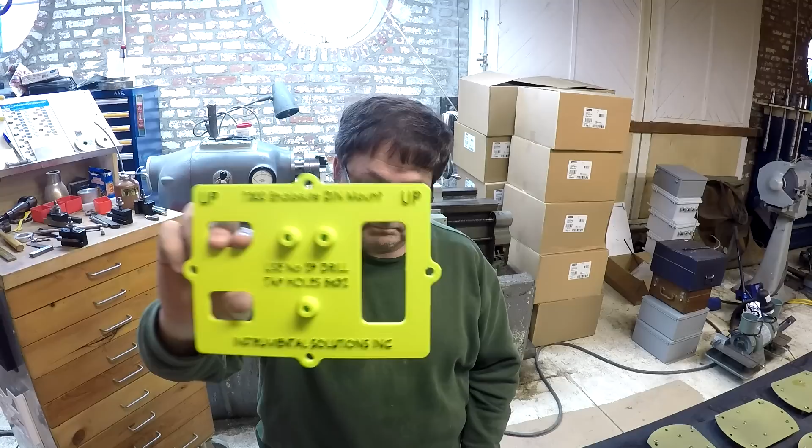Here we go. As you can tell, I 3D printed it. Take a look. At the top, it says 7300 enclosure DIN mount and up. And then there's some bosses to hold the drill guides. And I even included some text that says use a number 29 drill. And then that's my company name on the bottom down there, Instrumental Solutions Incorporated. And so this is the guide that I printed.

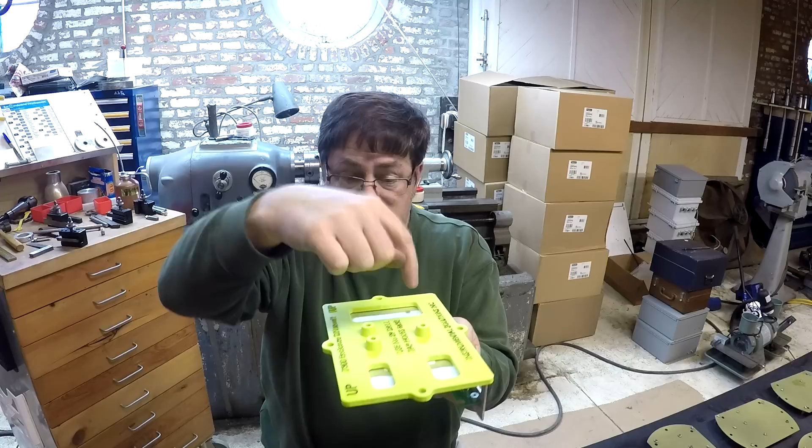And then the idea is to take this, put this over like a sacrificial block in the drill press. And then this will go up top. And then boom, boom, boom, boom, boom. You'll knock your holes out and you're good to go.

Why did I design it this way? What you see is I've got these holes in the sides, and I got some dowel pins. These dowel pins are going to go in these holes, and then a dowel pin on each side. That's what's going to locate this on the back of the box. You're like, why did I do it that way? Well, let's go to the computer and jump into SolidWorks. I'll show you the CAD work that I used to design this and why I came to the conclusion to do it the way that I did it. So let's get over to the computer and check that out.

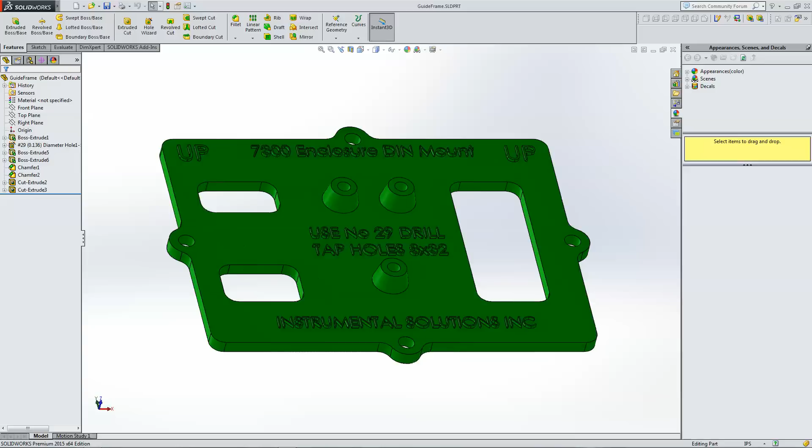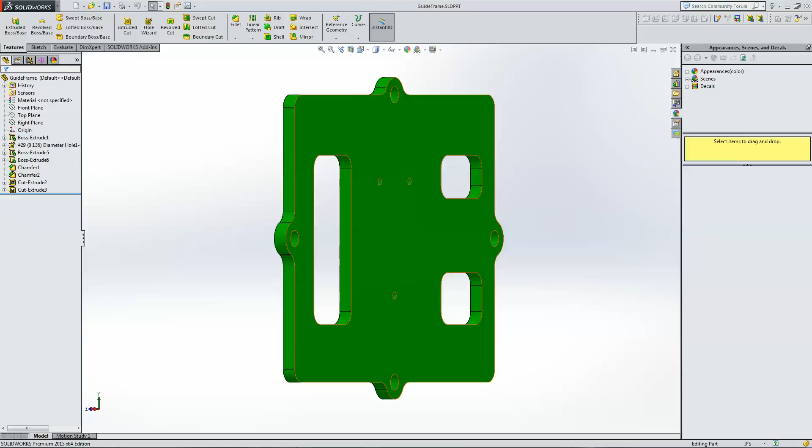Alright, so we're over at the computer here, and this is the CAD work that I used to generate this 3D print. What I originally wanted to do, which was kind of more normal, is I wanted to draw this top piece here solid, and then off the back, I'd extrude this out, and then I would leave a recess, and then it would just drop down over the box. Now I wouldn't need these pins. The reason I didn't do that is because you can't print over air, and I didn't want to have to leave support material in this big gap.

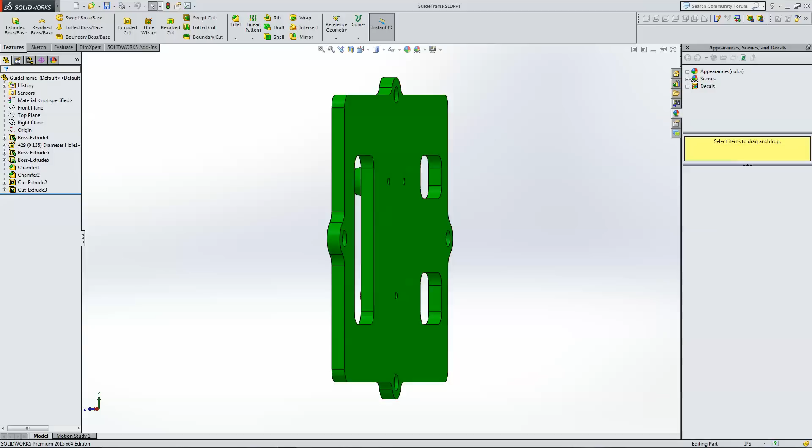The enclosure back panel is 7 3/16 wide and 5 1/8 tall. So I wanted something I could print flat. So this is what I came up with: this prints flat, and the pins here will locate me on the enclosure and give me a nice solid location, because there's a little bit of play on the up and down pins here, but there's very little play at all on these pins on the side. So it's gonna fit very securely.

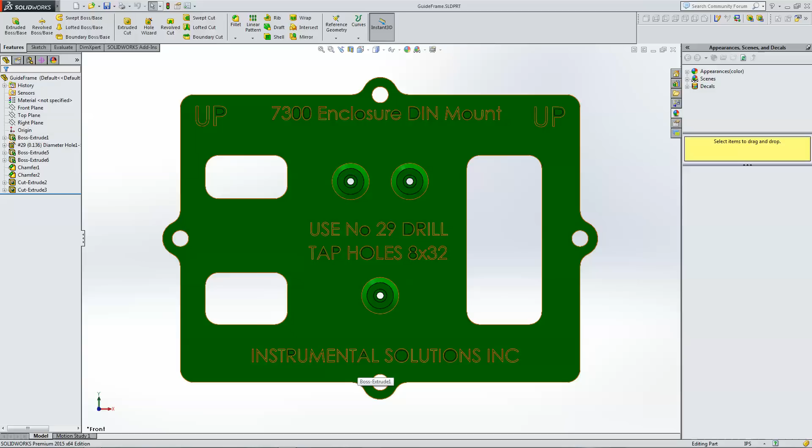And really, as far as the vertical placement goes, I don't care if it varies up and down, you know, 1/4 of an inch, 3/8 of an inch. I really don't care, as long as these 3 holes are placed in the correct proximity to each other. Then the DIN rail mount will mount, and the thing will go on the rail, and everything will work.

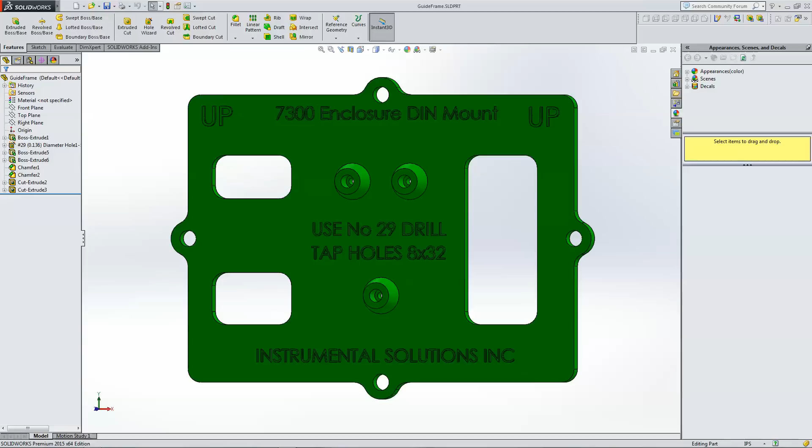As far as the letters go, all I did was do a sketch with a text feature, and then I just extruded these letters up 1/16 of an inch. And then I took a black marker and I just dusted the top of those letters with the black marker, and that colored the letters black. And I think it's very worthwhile. This printed last night and printed in about 4 hours.

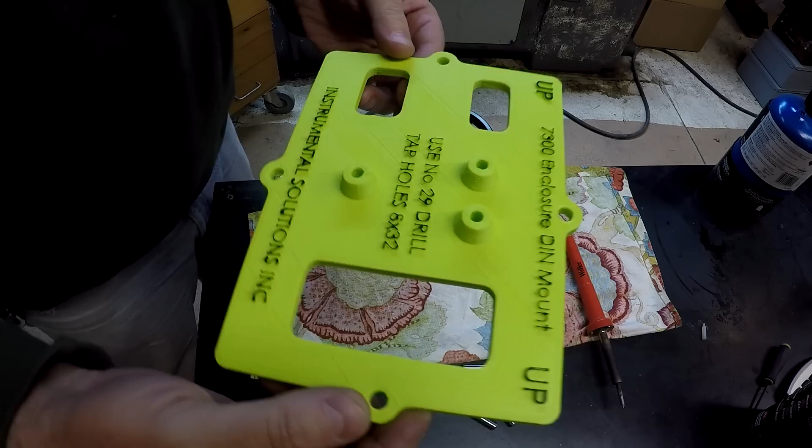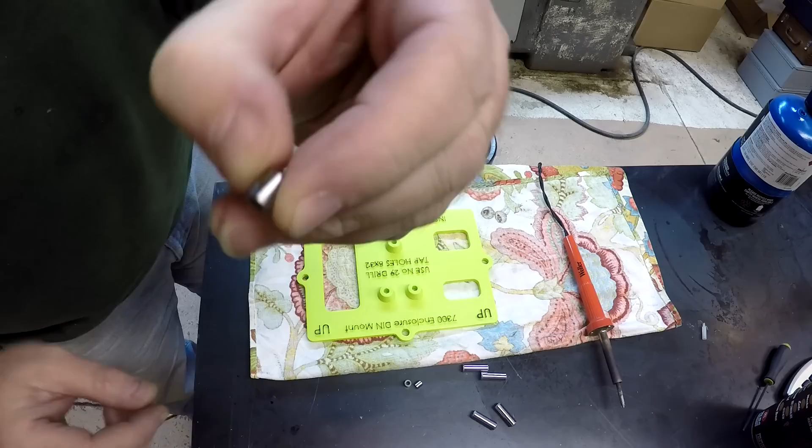Okay, we're back over here to mount. Again, give you another good look at the drill guide here. We're going to mount the little bitty number 29 drill bushings in here, and there's an upside and a downside on these things. The side with the number here has a more flared and radiused entry. This is the top. This end with the square end, this is the bottom.

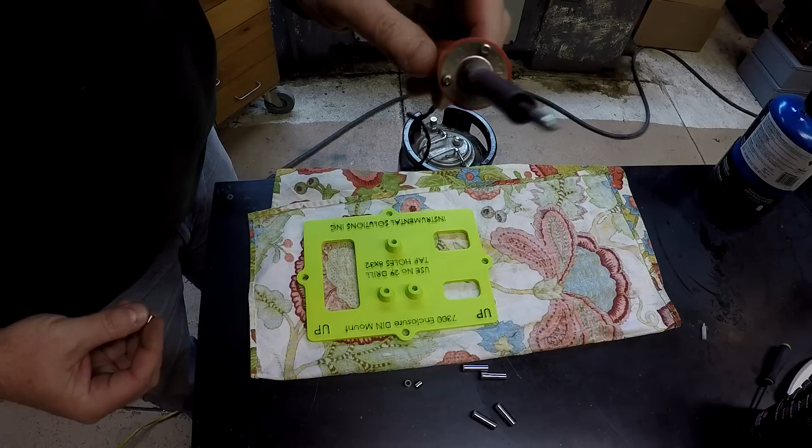The way we're going to mount these in here is we have a soldering iron here, just an el cheapo little Weller. We're going to put this bushing on.

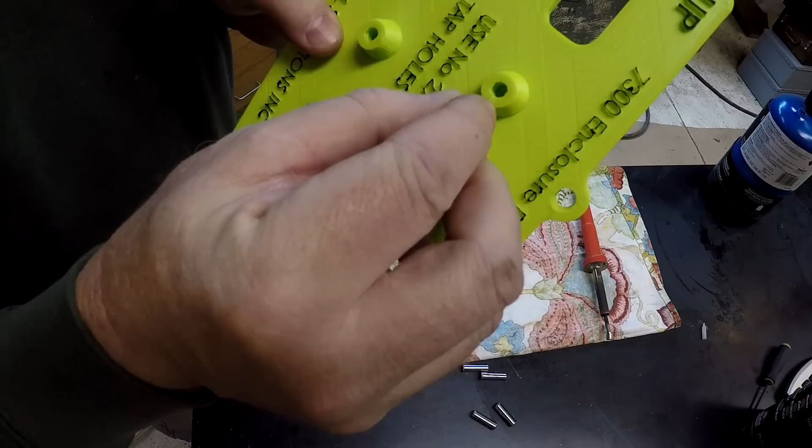Top onto the iron so that it heats up and the bottom is facing out. Give it a second here to gather some heat. A little solder on the iron helps to make that joint and to move that heat over there. And what we're going to do here is we're going to press the bushing with the soldering iron in here into this hole, which is just slightly undersized. We're not going to press it all the way down.

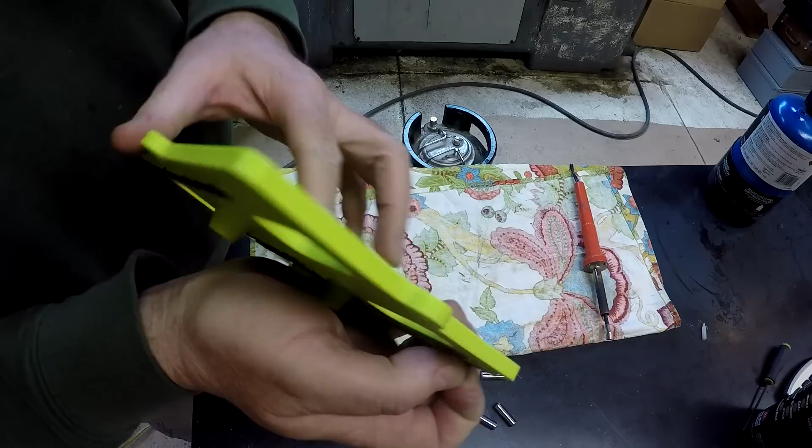It's a 1/4 by 1/4 bushing, right? So we're going to leave about a 1/16 of an inch proud and just leave the iron on it, but get it nice and hot. And then we're going to press the whole thing down flat on this metal workbench surface, which is nice and flat. And that's going to set the bushing in flush and square to this surface so that we have a nice flat entry. So the bushing is good and hot. You can tell because it's kind of taking on a little color.

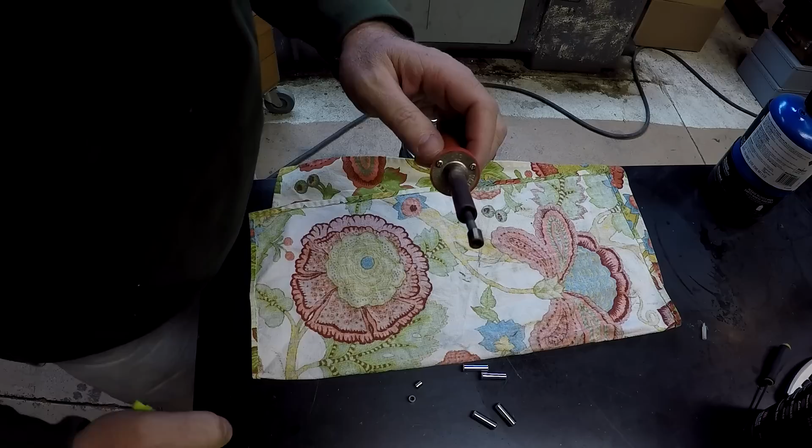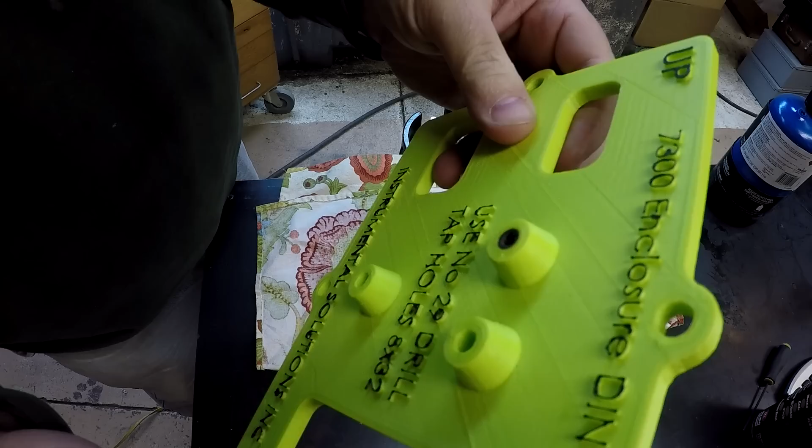Let's see if I can do this where you can see it. Let's get it started in there. Okay, stop pushing. Let it take some heat. Press it down. And hold it for a little bit. There we go. We got a nice flush fit. Lined up right on the hole. Don't know if you can see through there. See if I can get it lined up. Lined up, ready to go.

So let's take our second bushing. Drop that baby on the iron and let it start heating up. I've done some of these heat-set inserts, let it get good and hot. It goes in so much nicer once you let the bushing get good and hot, that it just makes everything easier. If it's not hot enough, you're going to push real hard, and then you got better chance of hurting yourself. You got a better chance of getting the insert off center and not located where you want it. All right, second one's hot.

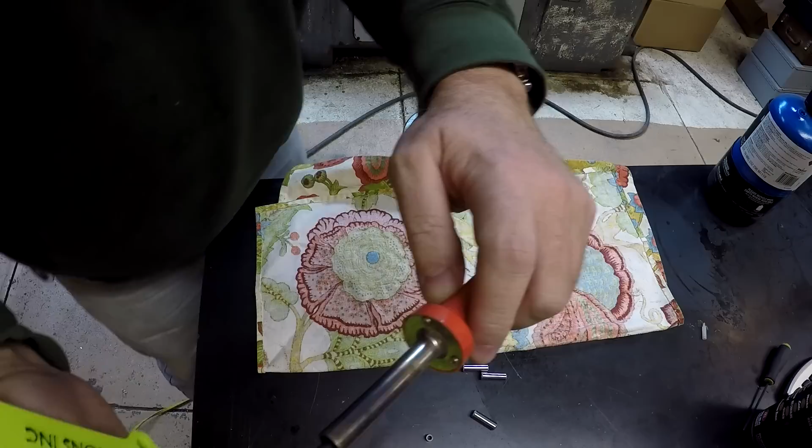Again, let's just do it the same way. See if we can get this up here where you can see it. Start pressing, get it in there. Don't press it all the way, just leave some heat on it. And then press it down. Good and square. Hold it while that plastic dries. Booyah, 2 inserts down. Alright, time to do the last one. I'm going to really try to get set up here so you can see this.

Ready. Got a little solder in that one there. I'll just drill right through. No big deal. So there we go. We got our bushings all in here. They line up very nicely with the holes, so our spacing is right. And now we need to place our pins. Locating pins in the corners. This is going to be a little bit more of a challenge. We're going to have to do this upside down against a flat work surface like so, and then press the pins in this way. So let me get some materials together here.

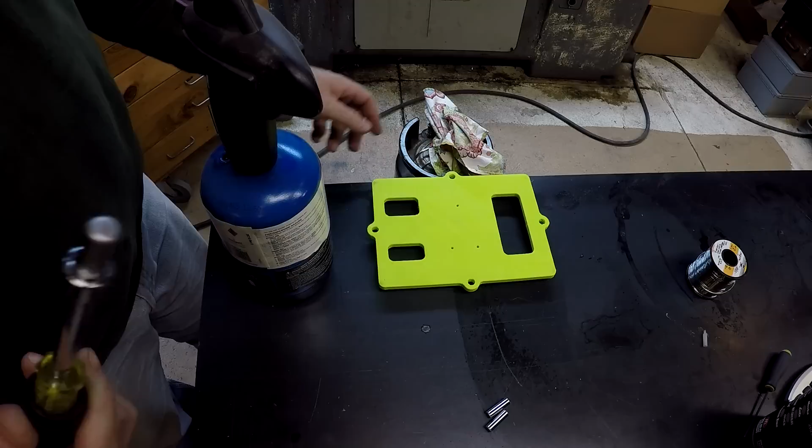Alright, I think we've got a technique here. I got a 5/16 nut driver. These are 5/16 dowel pins that I have here, and it's a nice snug fit. What I'm going to do is I'm going to take the old Bernzomatic, and we're going to heat this dowel pin up nice and hot using this holding facility of this nut driver, and then we're going to press it in that way so that it goes in nicely, and I can control it without trying to use fat gloves or anything.

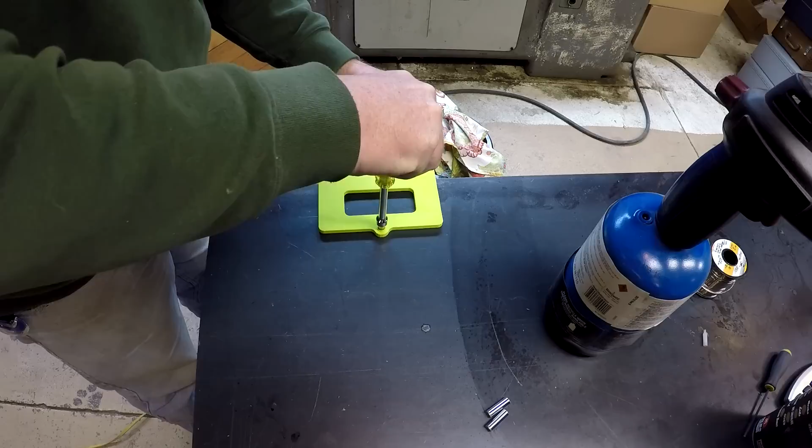All right, let's get the torch fired up here. All righty. Fire in the hole. Just getting a little heat on it with the torch here. Getting a little color there, nice and hot. Hold it for a second, let it cool. Yep, still hot. There you go. One down, 3 to go.

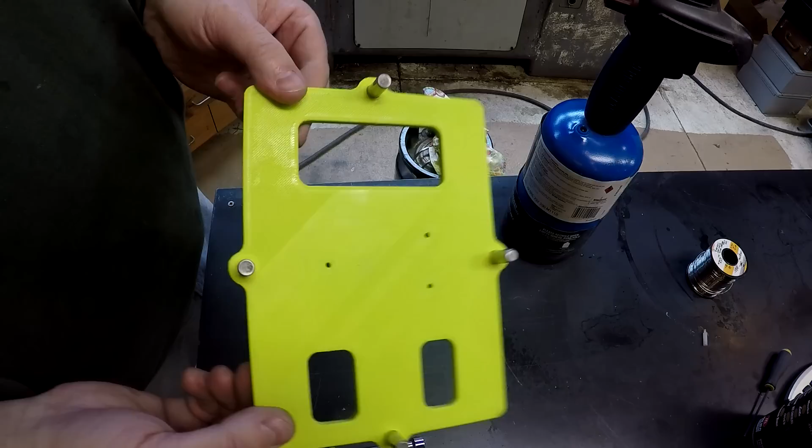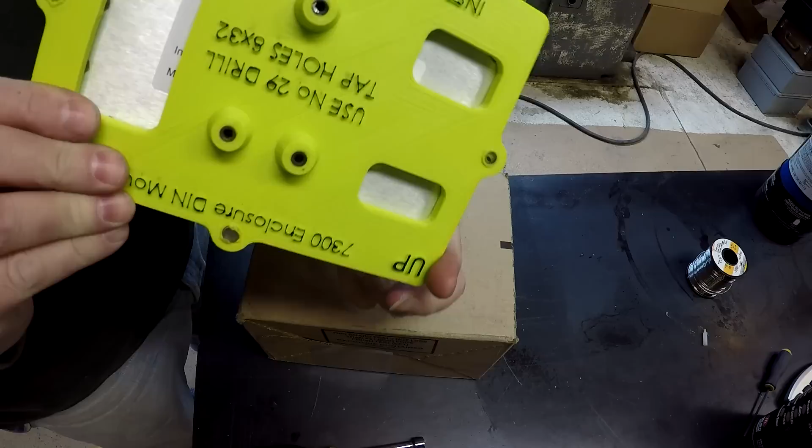All right. Turn the torch off. There we go. So our locating pins are in. We'll give it a second to cool off, and then we're going to give it a try. All right, so it's cooled down a little bit, and I've got the enclosure sitting in the drill guide. Here's the other side. And it's properly positioned. The upside is up here. Upside down to you guys.

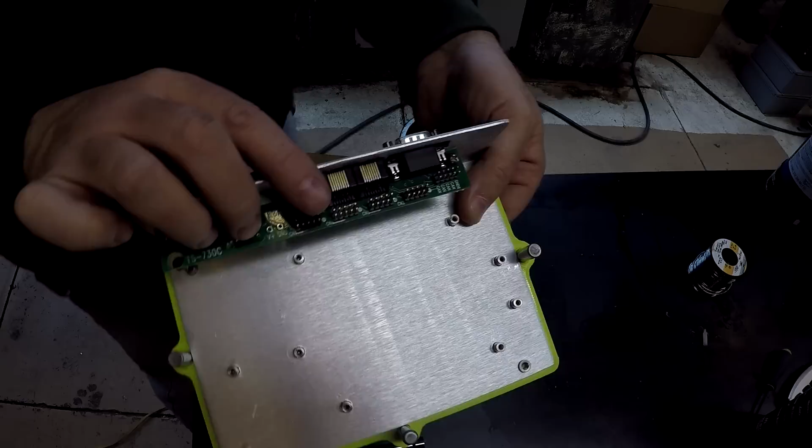There we go. Up is up. Now, I was talking about my position vertically this way along the mount. I've got a little bit of play in there, maybe a little more than a 1/16 of an inch, which is fine. But side to side, which is the important one, that's from this side to this side here. That's the one that's important, and if you look here at the pin, you can see I got a really nice fit on that pin, and I got a really nice fit on that pin.

So it's got literally a squeaking fit to get it in there. It squeaks going in, and then it gives me a nice snug fit. This is going to work out real well. So let me get a block. And we're going to set this up, and we're going to go ahead and drill the first case, and then we're going to tap it, and then we're going to try a mount on it, and just kind of verify that our 3D printed drill guide, which I think looks rather snazzy if you ask me, is actually going to work. So let's give it a go.

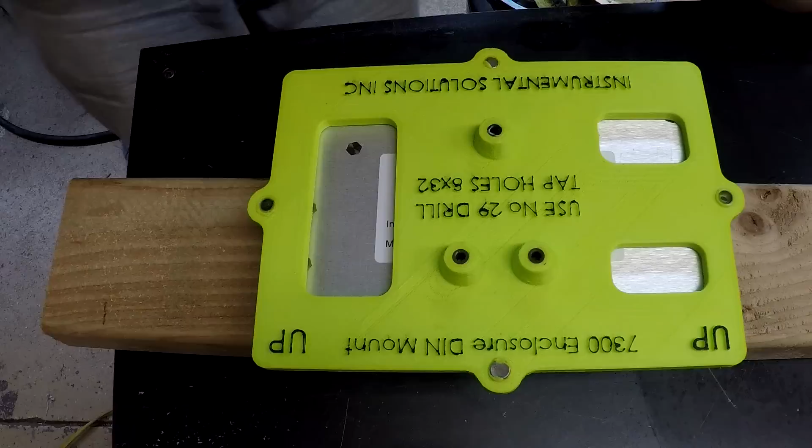All right, we've got our box here suspended, set up on a couple of scraps of 2x4. I wanted something that I could drill through into. And we've got our drill guide. Like I said, it's a tight fit. I can pick the drill guide up, and I'd have to shake this piece out, right? Which is a good snug fit. And let's get drill and drill bit, and let's cut a hole here. All right, here we go. Got my drill in here.

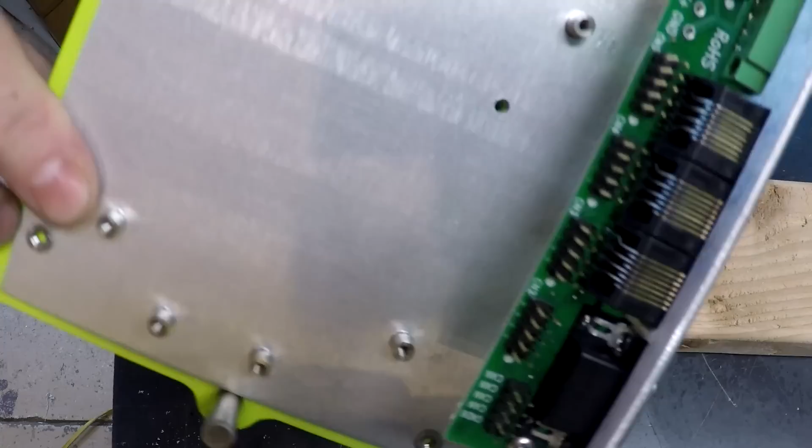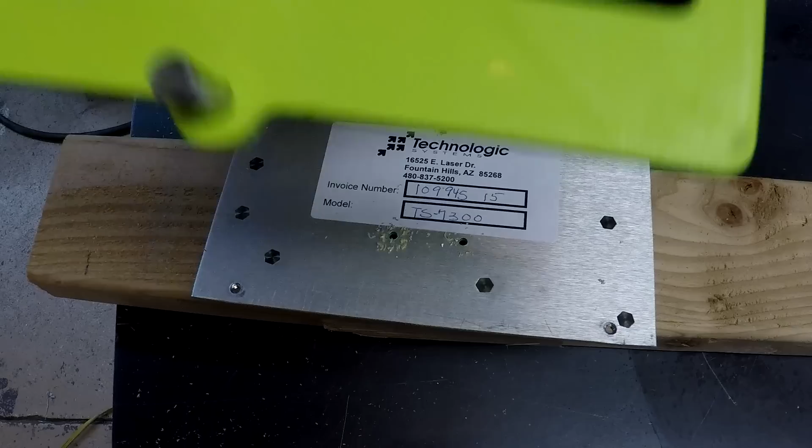All right, I had to drill some of that solder out first time and drill through the actual, there's the hole in the mount, drill through the excess plastic that's down the hole there. Of course, I'll be doing this. All right. There we go. Let's pop the mount off. Nice snug fit. Looking no worse for the wear there on the bottom. Set that aside.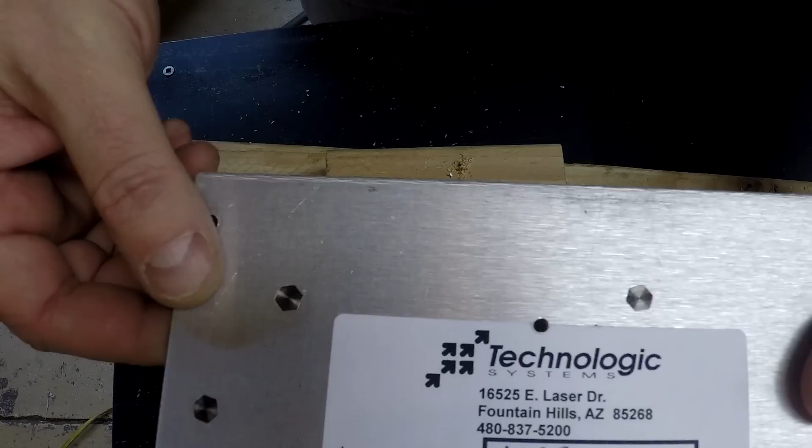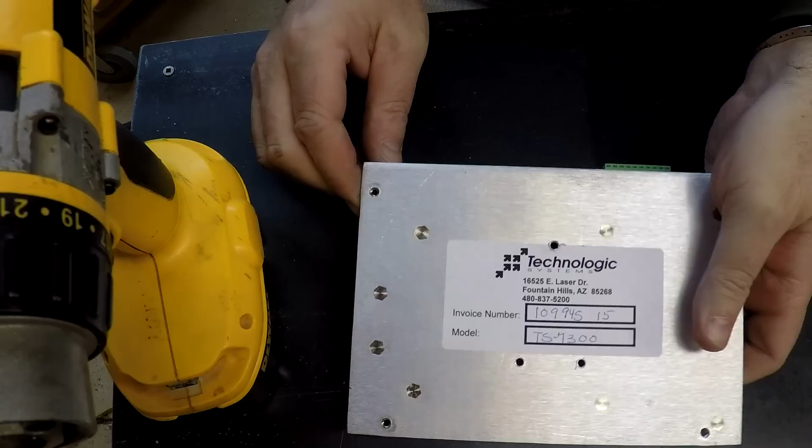There are our holes. Our three, here's the top two. Bottom one. So let's get a tap in here. Do some dirty hand tapping. Move that out of the way. All right, moment of truth. The holes are drilled and tapped. Got our mount right here.

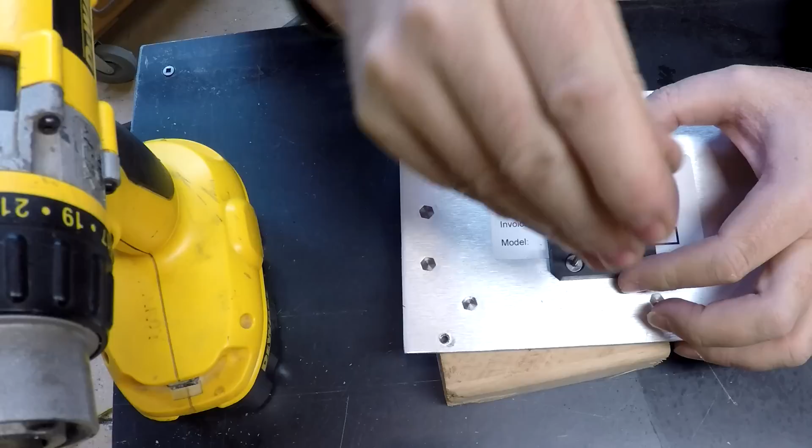We're attaching these with some 8-32 flathead socket head cap screws in stainless, which oddly enough are cheaper than black oxide. You know, when you're doing anything with flathead screws, make sure and get all three started before you torque them down. There we go.

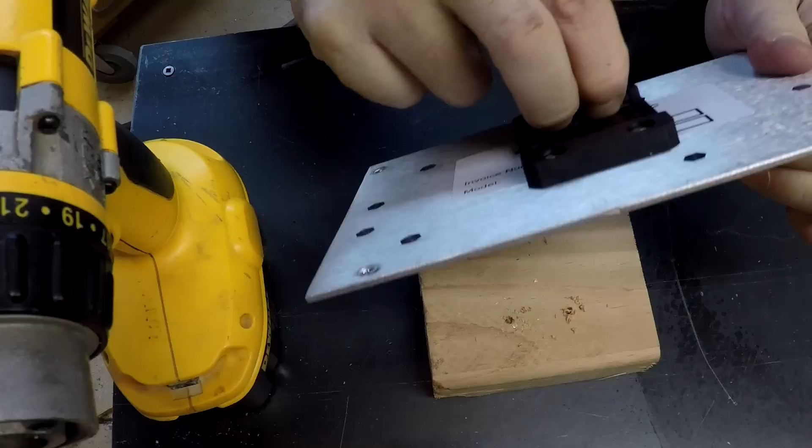There our mount is, and got our little DIN rail springs in there. This particular type of mount, the springs are open in the back, so it has to be used against a flat surface like this box. You couldn't use this against anything with any kind of relief or recess, or the springs will pop out. So there you go.

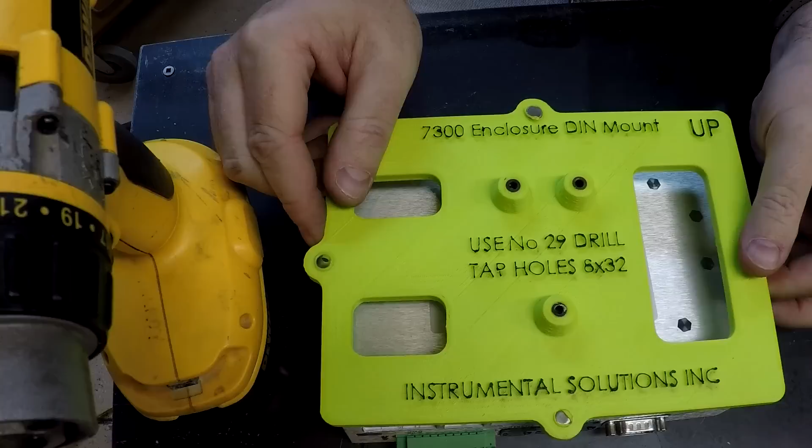Quick lesson learned here: make sure and deburr these holes before I tap them, because I had quite a bit of a problem with a big burr on this hole right here. But other than that, it looks like our drill guide is going to work. And there you go. So I think this is another great use for 3D printer. So there we go. Yet another use for 3D printing technology in the shop. Tooling.

If I would have decided to make this out of aluminum, I mean, I've got a few sheets of tooling plate, MIC-6 plate sitting around. I would have had to, you know, cut the OD. I would have had to place in a very precise manner pockets for the inserts. I would have had to recess the back for the box. A lot of milling there would have had to have been done. It would have taken several hours of work to build that up into an aluminum drill jig. I drew this in about 30 minutes.

And it printed while I was, like I said, at home enjoying a birthday cake with my daughter.

And by the way, thanks everybody for the nice comments on my Facebook post about my daughter's birthday. So she's 9, she's a beauty, and you know, she needs to slow down. You know, I want as many of these years as I can get. But